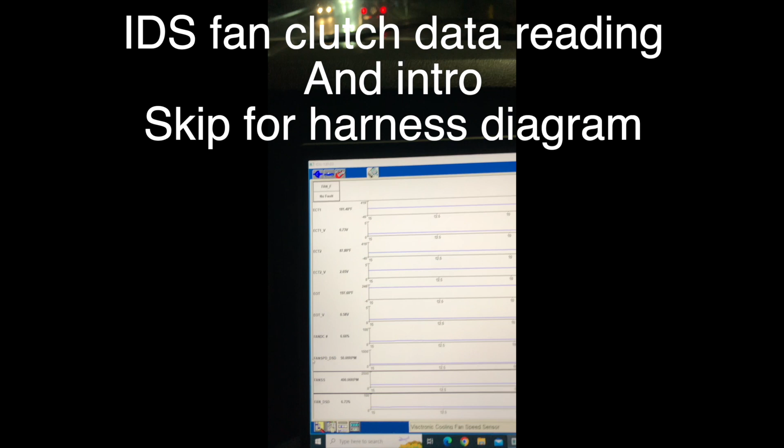This video we're gonna go through the Visctronic fan clutch wiring harness on the Ford Powerstroke. This system is used by many manufacturers due to its efficiency for miles per gallon, as it applies less drag on the engine, and also the amount of speed that's on demand, controlled by the ECU, is very precise and controllable.

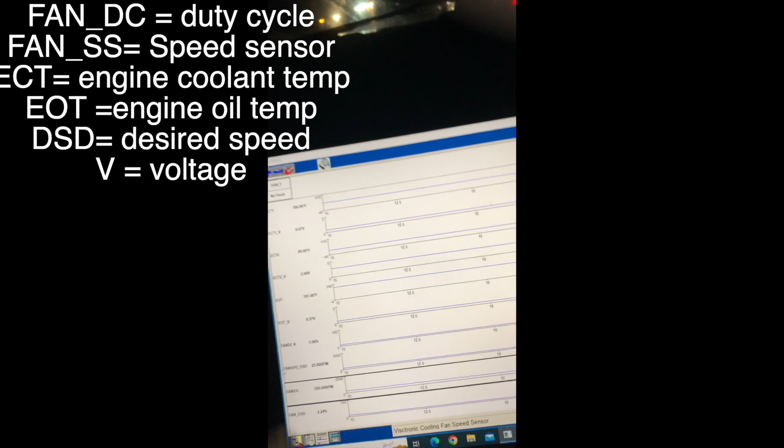How this thing works: there is a part of the fan clutch that rotates at the same speed as the pulley, and the silicone, our viscous material here, works as a coupling. It resides in a reservoir with a controlled inlet valve that is controlled by the ECU, whether being allowed in or not, and it will hit the fins that will spin an outer housing that's connected to the fan blades.

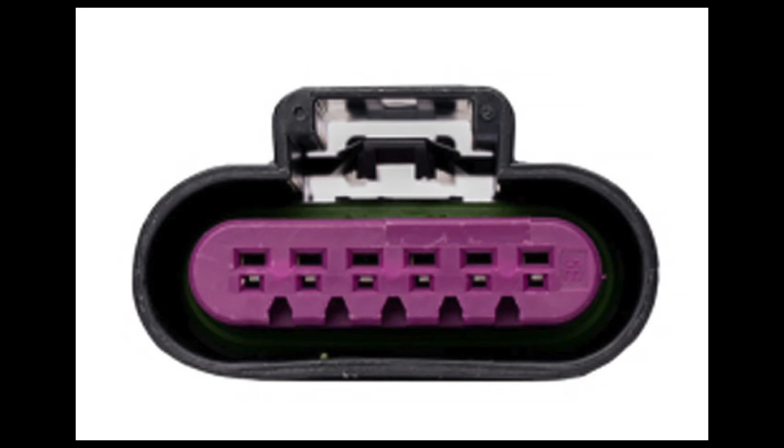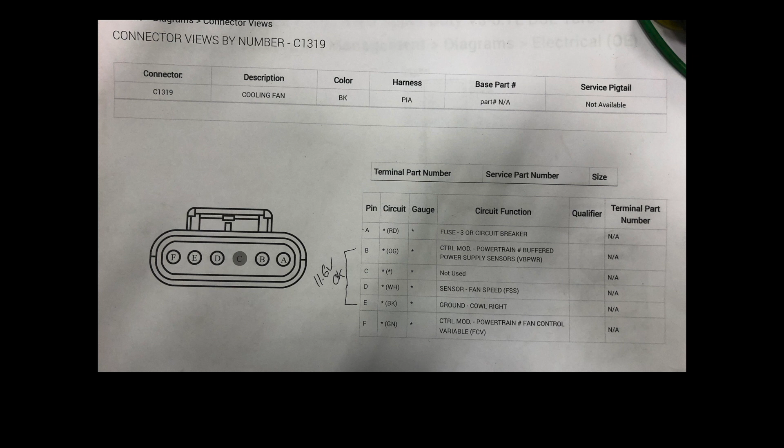So here's our connector, and it goes straight - that's the last connector you can find on the fan clutch itself, and it has 5 connections, 5 wires. One power supply goes straight to the fuse, and it's in red, and then the orange one goes straight to the control module, providing a power supply for the sensor.

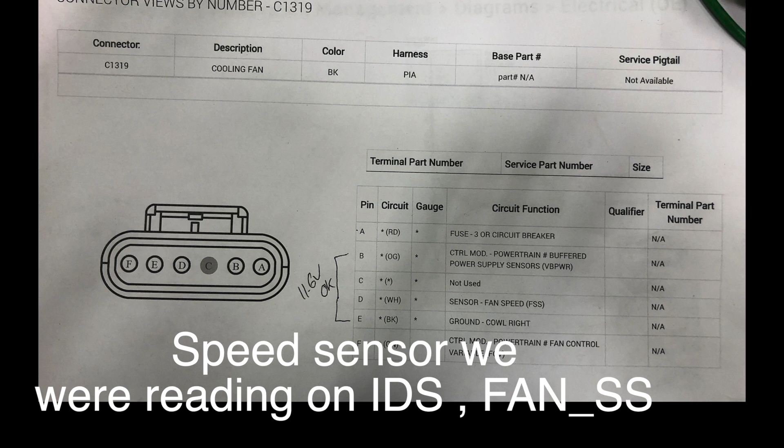So there is a speed sensor built into this fan clutch. The D is the fan speed signal, in white wire, and there is a black wire that goes straight to ground, and there is the F on the very last, and that goes straight to the ECU - that's the fan control itself.

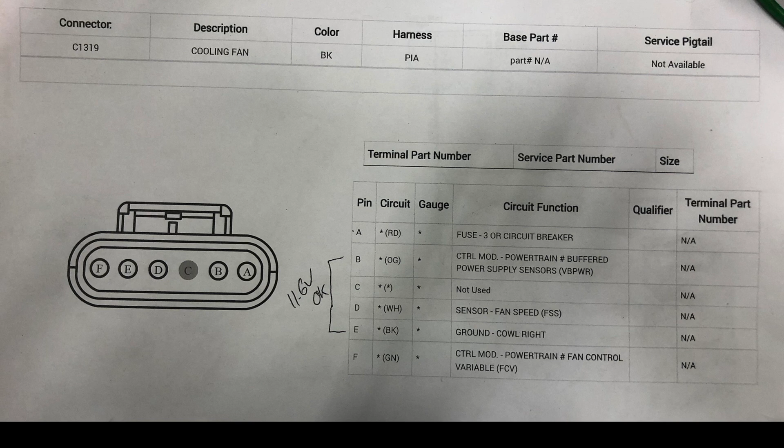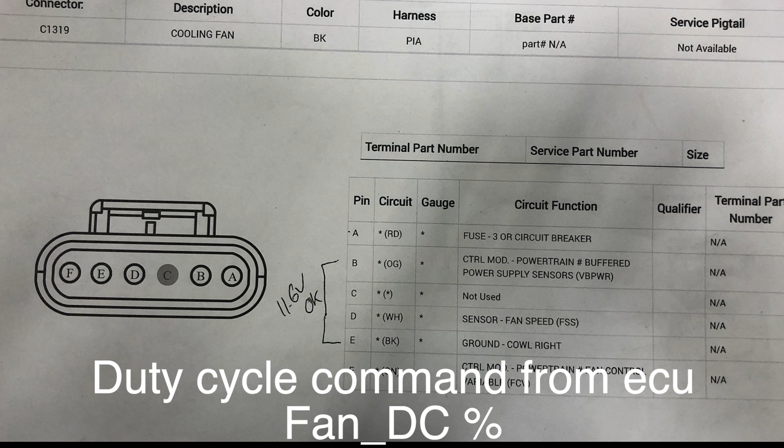It's called the fan control variable, and that will appear from the ECU as a duty cycle, and that's on demand from the ECU how much the fan is needed. It controls us through that connector.

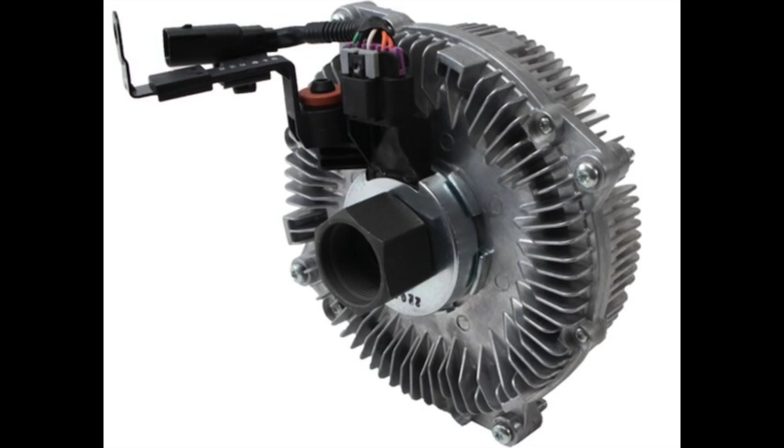Let's go to the diagram here, and you will see that the wire color will change - that's the very short, quick connector harness, and you will see there is a bracket that holds it around the pulley, very close to the belt. So yeah, that can get damaged. Well, we haven't seen any of those going bad. But there you go, it's much more explained.

The red goes straight to the fuse, it's fuse F3, and it's 20 amp. Also, the same fuse goes to the power distribution and exhaust brake system. The FSS is the fan speed sensor, and that's the actual signal for the fan speed, and that's the input for the PCM. Then the FCV is the duty cycle.

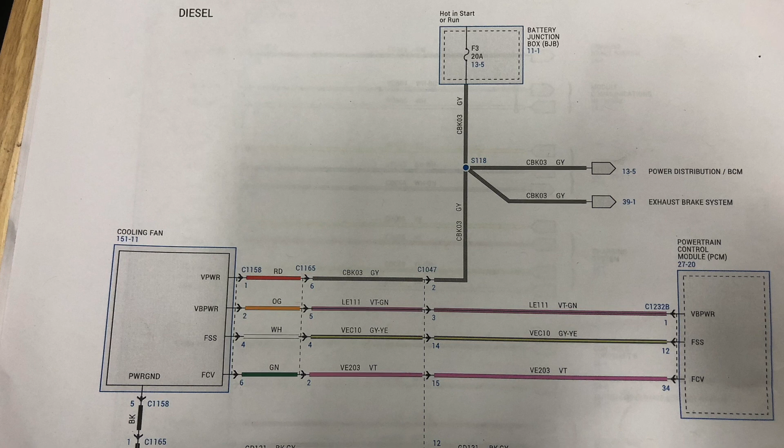That's the control command from the PCM that tells the cooling fan how much of a duty cycle. Once the duty cycle is at 100%, that means it's commanding it to run at its full power, and at 0%, it's not commanding it to run at all.